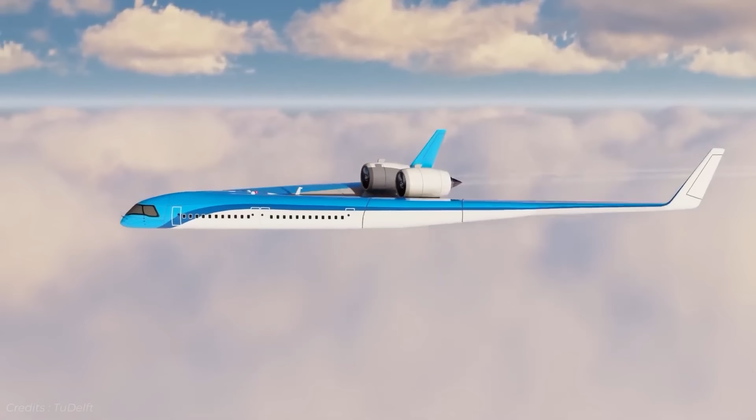The Flying V is a futuristic plane that a lot of you guys found interesting, to say the least. In the first video I made, people went all out in the comment section asking all valid questions like how are airports going to handle this and how is passenger comfort going to play out?

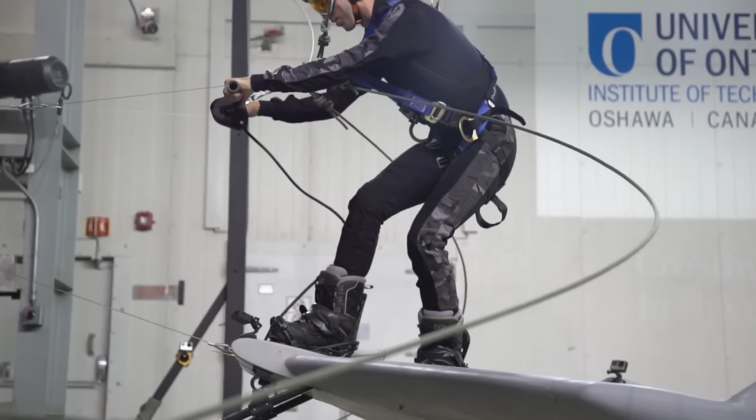But the most critical question asked was, if this design is so revolutionary, why hasn't it taken over the skies yet? What are engineers discovering in wind tunnels that's making even the most optimistic aerospace experts pause? And who is the other player lurking around the corner?

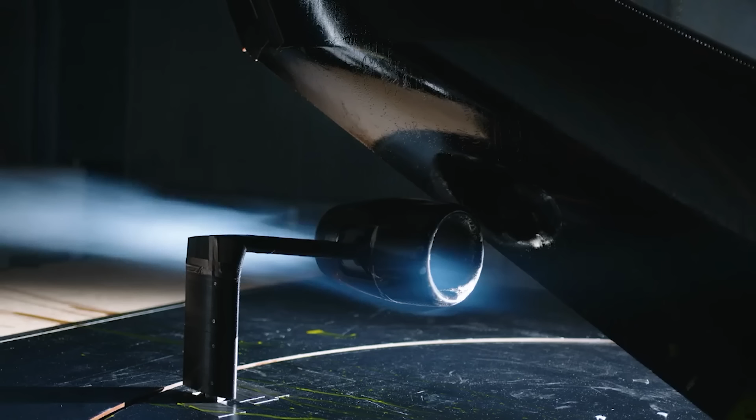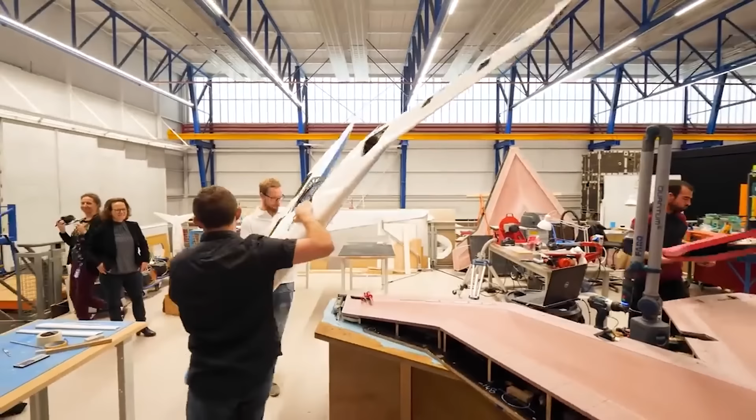Today we're diving once more deep into the Flying V, but this time more into the transition from computer screens to actual flight testing. And we take a closer look at another company working on the same kind of type and how they might be winning the race. You have to keep watching if you want to know all about the recent developments as of the beginning of 2026.

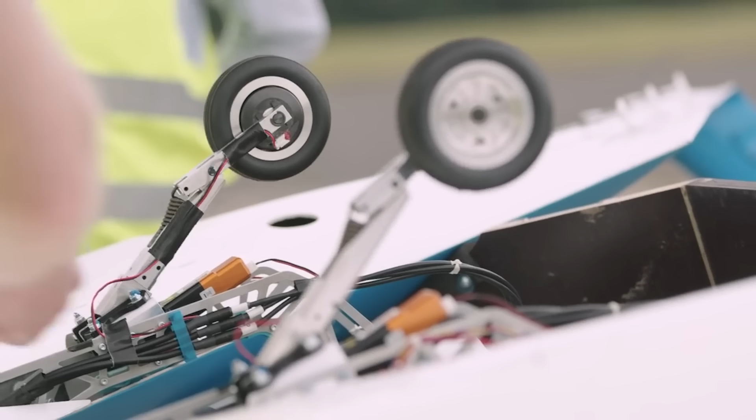What if the revolutionary aircraft that promised to transform aviation is now racing against an American rival with billions in funding and military contracts? A few years ago, the Flying V from the Netherlands went viral, promising 20% fuel savings and a radically different flying experience. But as we enter 2026, the landscape has completely changed.

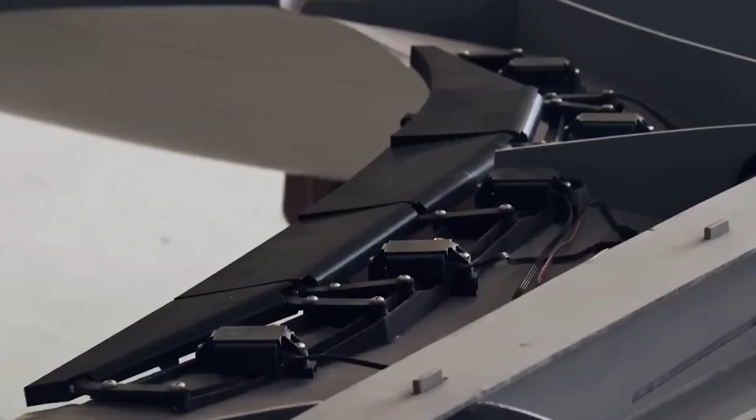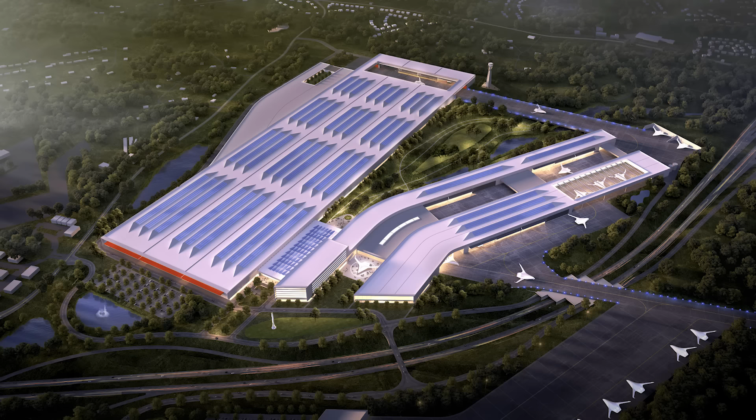JetZero, a California startup, just secured over $1 billion in commitments and is building a $4.7 billion manufacturing facility in North Carolina. Their full-scale demonstrator is scheduled to fly in 2027, with United Airlines already ordering up to 200 aircraft.

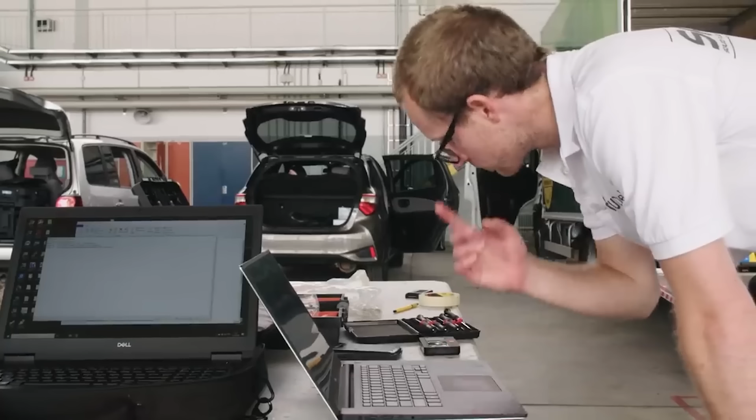Meanwhile, the Flying V team at TU Delft continues their methodical research approach. So here's the real question. Is Europe's careful academic research about to lose to America's aggressive commercialization?

The Flying V began as a master's thesis project by Justus Benad during his internship at Airbus in Hamburg. Since then, TU Delft has partnered with KLM Royal Dutch Airlines and Airbus to develop this radical V-shaped aircraft where the passenger cabin, cargo hold, and fuel tanks are all integrated into the wing structure.

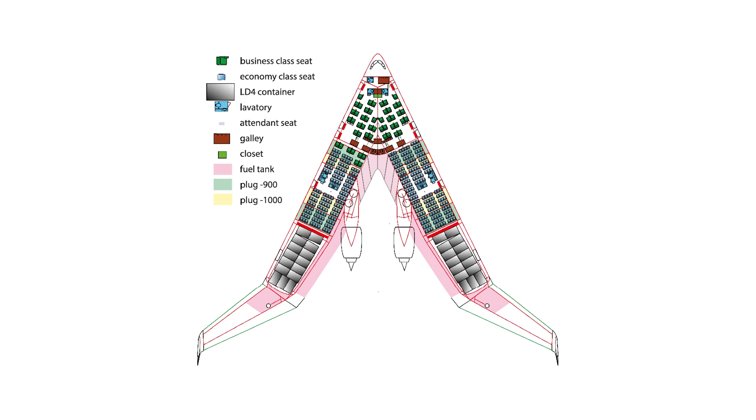The design promises 20% better fuel efficiency compared to an Airbus A350 due to reduced drag and weight. The aircraft would have the same wingspan as an A350, allowing it to use existing airport infrastructure while carrying 314 passengers in standard configuration.

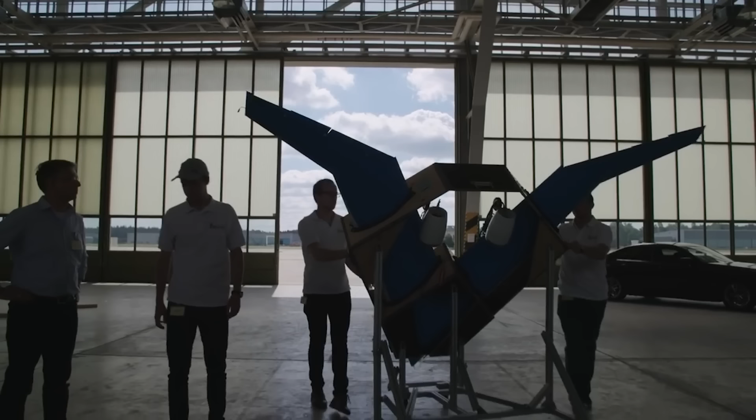In September 2020, the team achieved their first major milestone, flying a scale model at a German airbase. The 22.5 kilogram, 3 meter wide model successfully demonstrated that the radical aerodynamics could work in practice. Chief engineer Malcolm Brown, controlling the plane remotely via laptop, described the emotional moment after 2 years of intensive development.

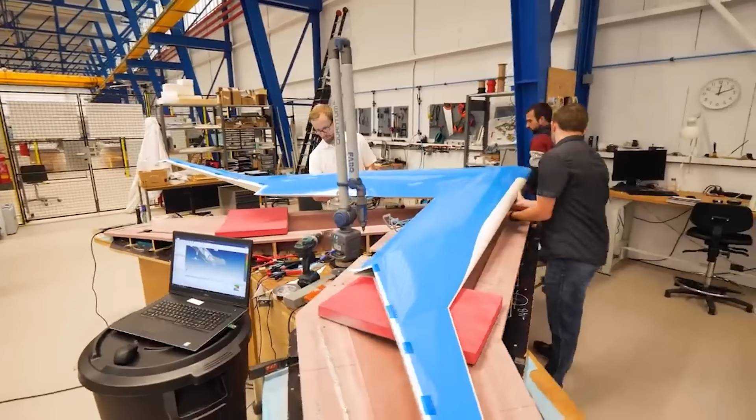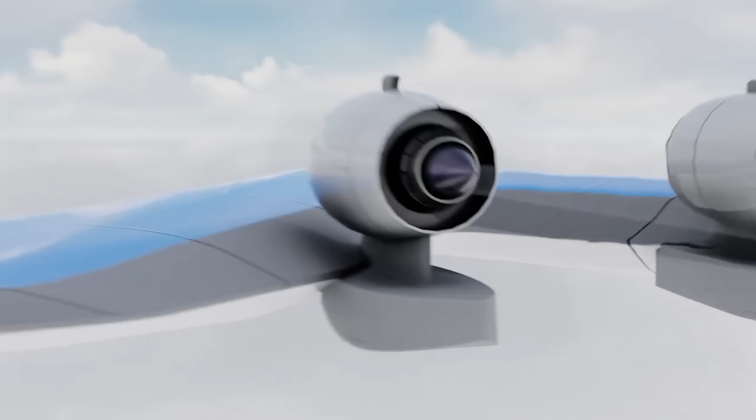However, the flight data revealed a significant challenge that still hasn't been fully solved, the Dutch roll problem. In conventional aircraft, the vertical tail fin acts like a weather vane, providing directional stability. The Flying V has no traditional tail, relying instead on winglets and sophisticated computer control systems.

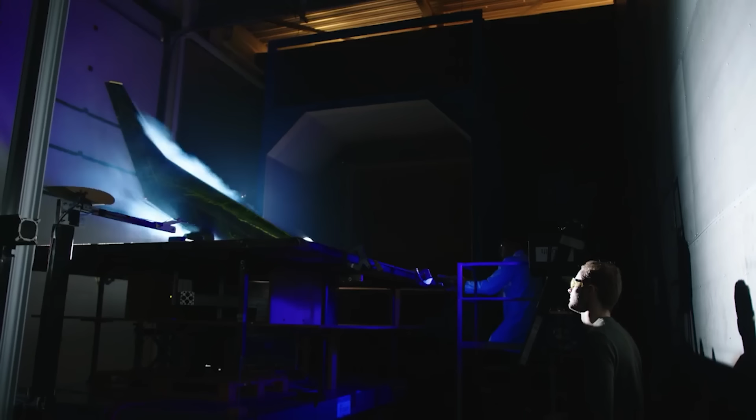During testing, the model exhibited a troublesome yawing and rolling motion that would feel like being on a boat in rough seas to passengers. This isn't just uncomfortable, it's a potential certification showstopper. The team has been working on active flight control systems similar to those used in the B-2 stealth bomber, where computers make hundreds of tiny adjustments per second to maintain stable flight.

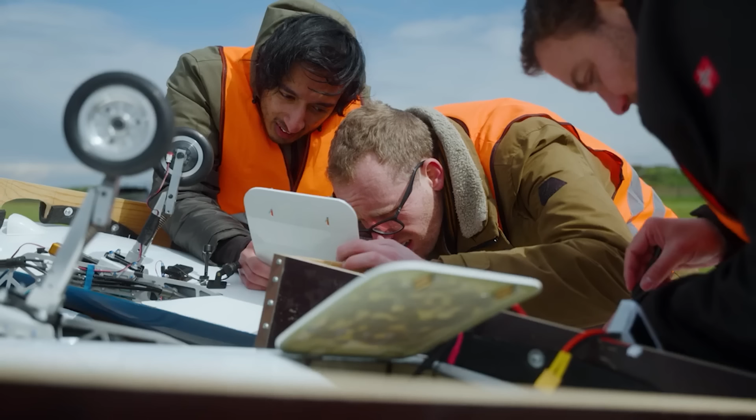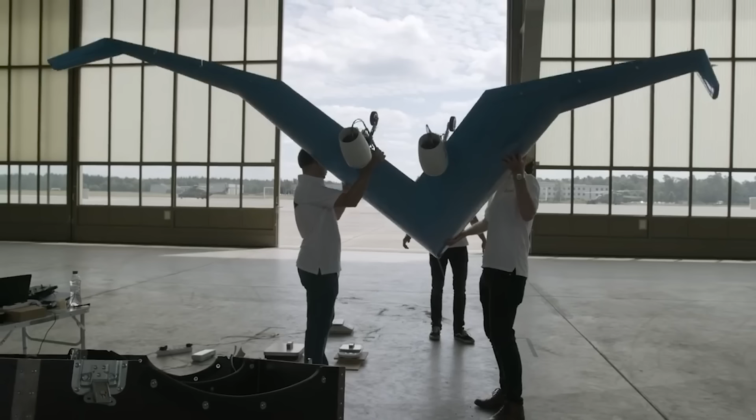As of 2026, TU Delft continues researching multiple aspects of the Flying V. Dr. Roelof Vos, the project leader and associate professor at the Faculty of Aerospace Engineering, has teams working on aerodynamics, structural engineering, noise characteristics, and flight behavior.

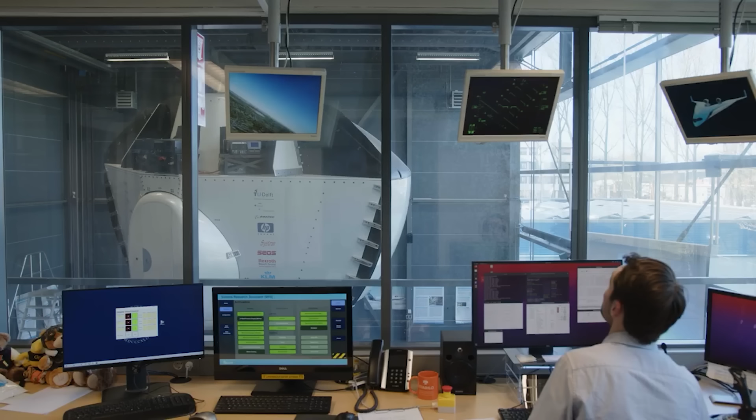The university has conducted at least 8 test flights of the scale model, with data feeding simulators where KLM pilots are now flying the unusual aircraft virtually. According to reports from 2023, pilots describe it as flying like a normal jet once the control systems are properly tuned.

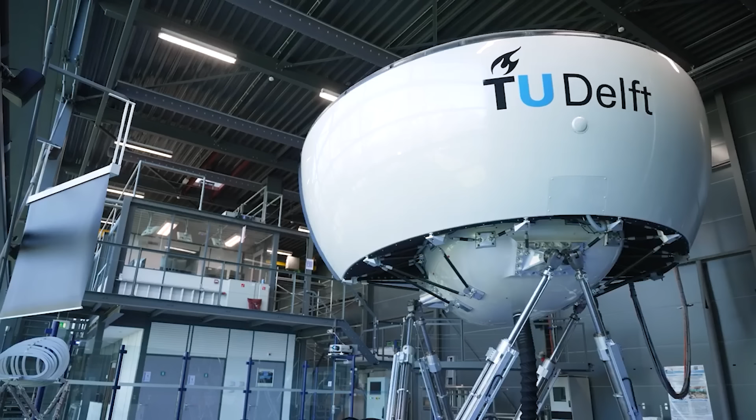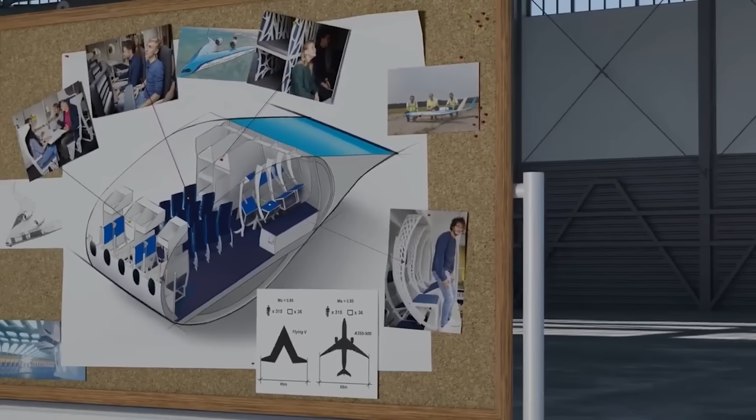The long-term development plan includes several phases: continued simulator work, wind tunnel testing to validate efficiency claims, building a full-scale cabin mock-up for passenger experience research, and eventually constructing a mid-scale demonstrator large enough for a human pilot. The interior mock-up has been particularly interesting, featuring innovative seating arrangements that take advantage of the V-shape's unique geometry.

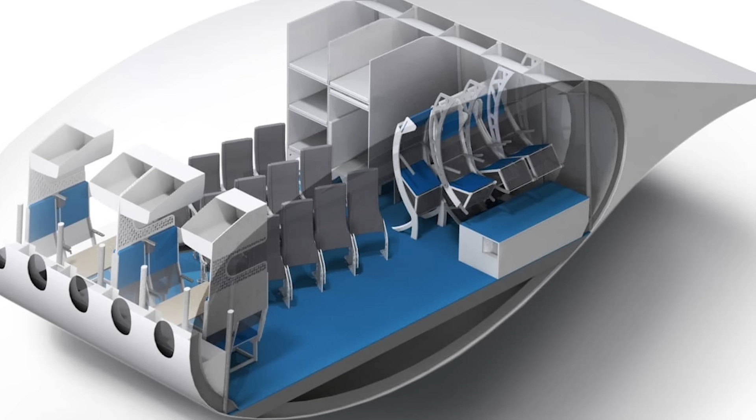Because the wing is so thick, designers can stack seats in staggered, three-dimensional patterns rather than traditional flat rows. They've also created social zones in the corner areas where passengers can sit across from each other at tables, completely reimagining the flying experience. But there is a significant psychological challenge.

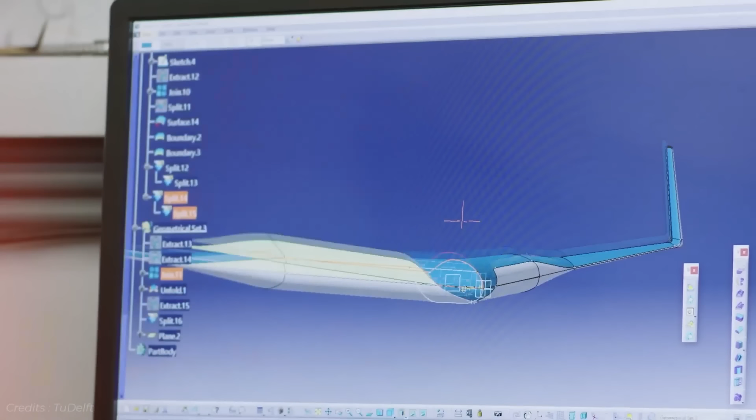Passengers sitting in the center of the wide cabin would have no windows. Researchers are testing virtual window technology using high-definition OLED screens, displaying real-time exterior camera feeds. But early surveys show mixed reactions. Some find it innovative, others deeply uncomfortable.

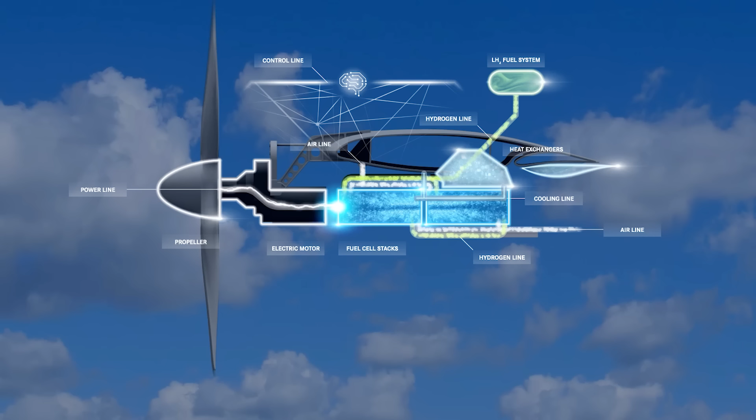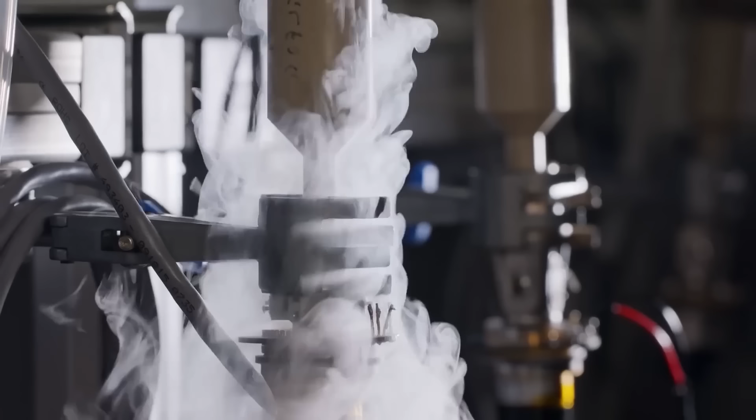Hydrogen propulsion has become central to the Flying V's value proposition. The thick wing structure provides ideal space for the large cylindrical tanks needed to store liquid hydrogen at -253 degrees Celsius. While hydrogen would reduce the aircraft's range by about 35% and consume roughly 70% of cargo volume, Dr. Vos has stated this is the necessary compromise for carbon-neutral aviation.

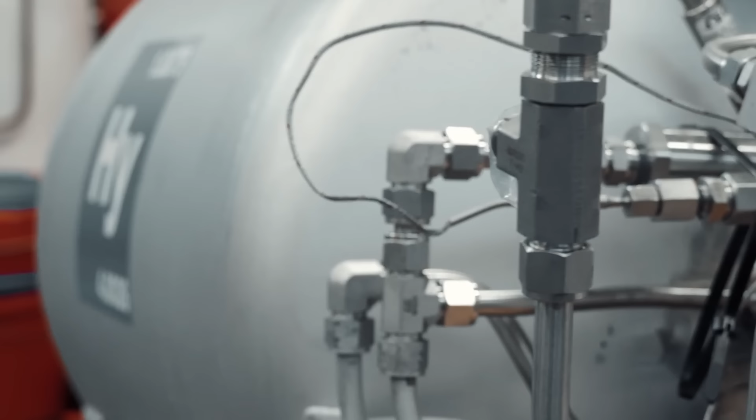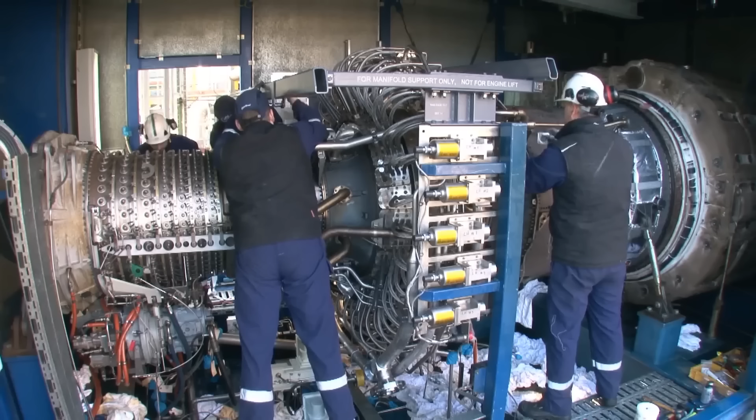TU Delft is actively involved in the EU-funded GOLIAT project, which is developing liquid hydrogen handling and refueling infrastructure at European airports, including Rotterdam The Hague Airport. The university's research covers everything from hydrogen combustion in jet engines to airport ground operations for hydrogen aircraft.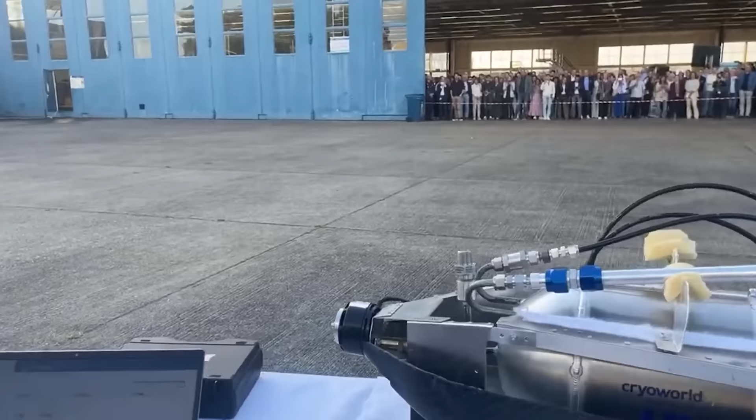Separately, the Aero Delft student team at TU Delft made headlines in 2025 by becoming the first student team worldwide to successfully test a liquid hydrogen-powered aircraft propulsion system. Their full-scale Phoenix aircraft, built on a Sling 4 airframe, aims to fly on gaseous hydrogen in 2025 and liquid hydrogen in 2026. This pioneering work demonstrates that hydrogen aviation isn't just theoretical anymore.

Now, let's talk about the elephant in the hangar, JetZero. This California startup founded in 2021 is pursuing a blended wing body design, which is similar in concept to the Flying V, but with a smoother manta ray shape rather than a sharp V. The critical difference isn't just the shape, it's the approach and resources.

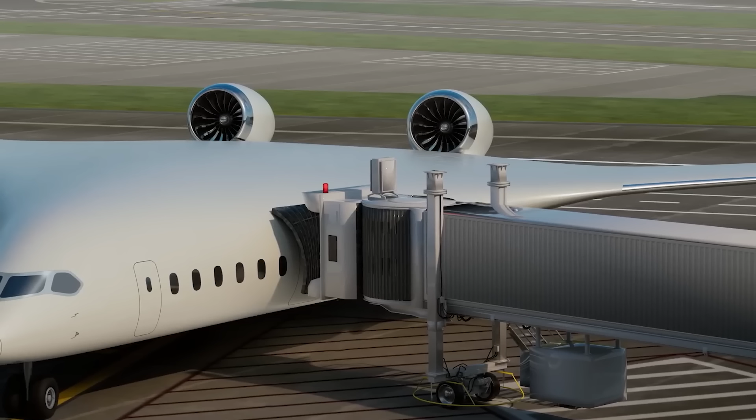In August 2023, the US Air Force awarded JetZero a $235 million contract to build a full-scale demonstrator called the Z4. In January 2024, JetZero announced they've secured over $1 billion in total commitments, including commercial agreements, government grants, and private investment.

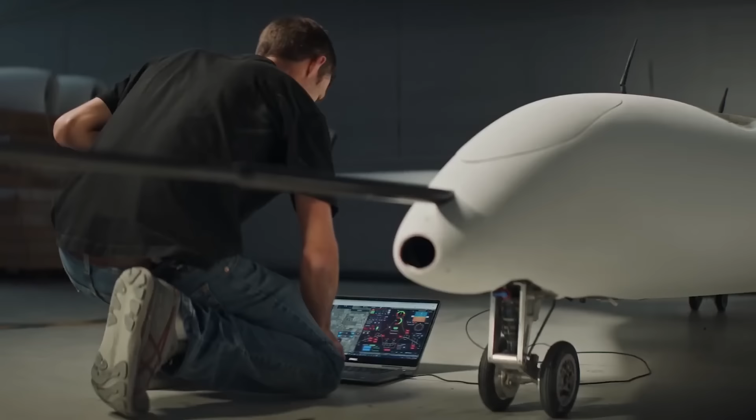The company is investing $4.7 billion to build what they're calling the Factory of the Future near Piedmont Triad International Airport in North Carolina, creating an estimated 14,500 jobs. This represents possibly the largest job announcement in North Carolina history.

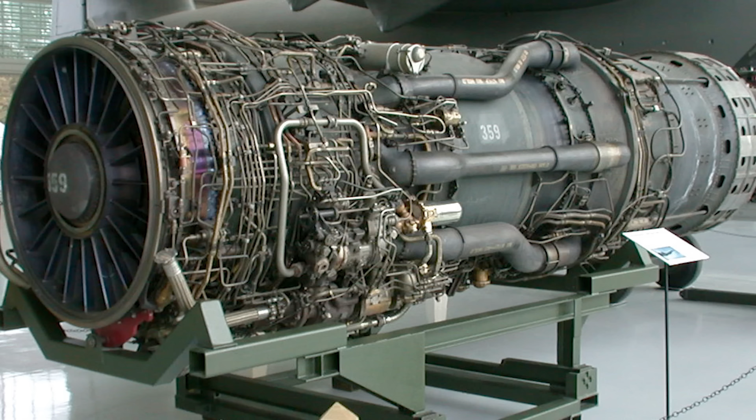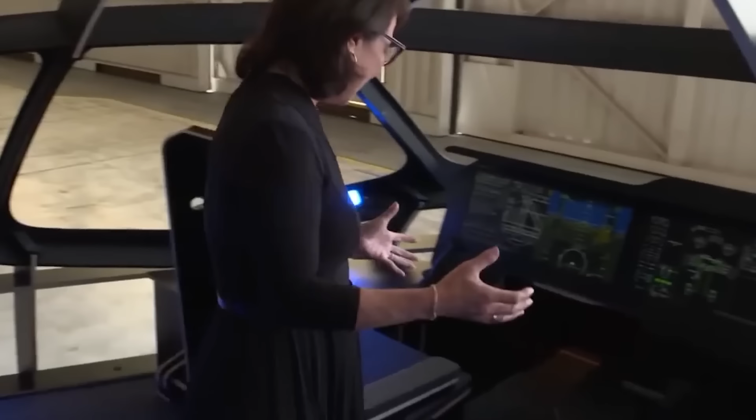The Z4 is designed to carry 250 passengers using existing Pratt & Whitney engines, targeting what's called the middle of the market category, between narrow-body and wide-body aircraft. JetZero claims their design will achieve 50% better fuel efficiency compared to current aircraft, significantly more ambitious than the Flying V's 20% target. The full-scale demonstrator is being built by Scaled Composites, with fabrication taking place throughout 2026, ground testing starting in April 2027, and first flight scheduled for September 2027.

The commercial interest in JetZero is remarkable. United Airlines signed a conditional purchase agreement for up to 200 Z4 aircraft, with the order dependent on hitting development milestones, including that crucial 2027 first flight. Alaska Airlines provided funding in an earlier investment round. Delta Airlines is providing expertise on cabin layout and passenger experience, with their representatives enthusiastically describing the potential for revolutionary customer service in the uniquely shaped cabin.

In July 2025, at the American Institute of Aeronautics and Astronautics Aviation Forum in Las Vegas, JetZero and its airline partners showcased their vision for the passenger experience. The triangular cabin layout allows for a central bar or island area, fundamentally reimagining how flight attendants can deliver service. Delta's Director of Sustainable Skies Lab, Sangeeta Sharma, told attendees that their flight attendants are genuinely excited about delivering a next-level customer experience in this aircraft.

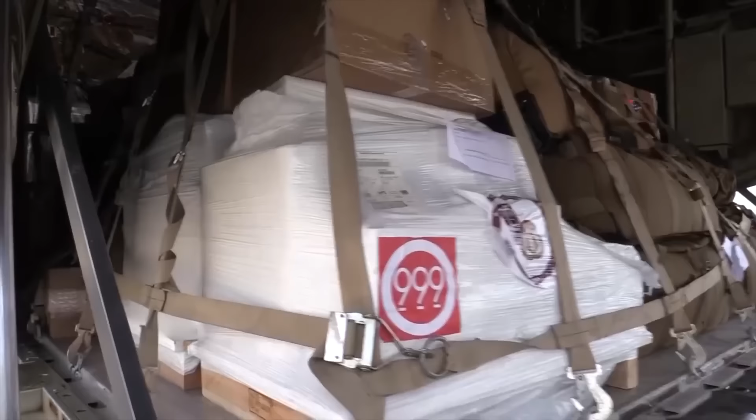The Air Force's interest goes beyond just fuel efficiency. Military logistics depend heavily on fuel supply chains, and a 50% reduction in fuel consumption would be strategically significant for military operations. Additionally, the Air Force is exploring the blended wing body design as a potential platform for next-generation aerial refueling and cargo transport, possibly replacing aging C-5, C-17, and C-130 fleets.

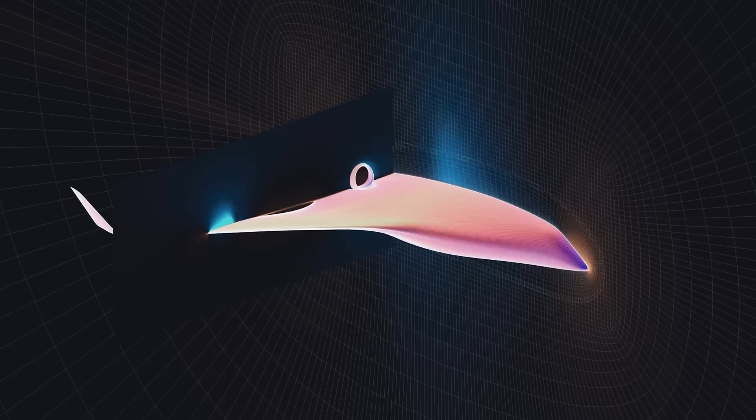As of early 2026, JetZero reports significant progress. They've completed cockpit tooling, are testing full-scale fuel tanks, evaluating wing test articles, and have already conducted flight tests on a subscale model called the Pathfinder, which received FAA airworthiness certification. The company passed its critical design review in mid-2025. All systems are tracking toward that September 2027 first flight target.

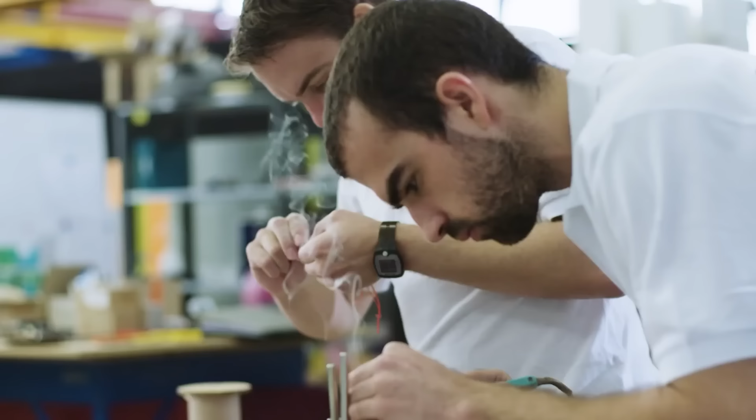So what does this mean for the Flying V? The European project continues its methodical academic approach, publishing research papers and advancing scientific understanding. TU Delft has permanent staff and graduate students working on various aspects, with Airbus maintaining involvement. However, there's no announced timeline for a full-scale demonstrator, no massive manufacturing facility under construction, and no conditional purchase orders from airlines. The contrast is striking.

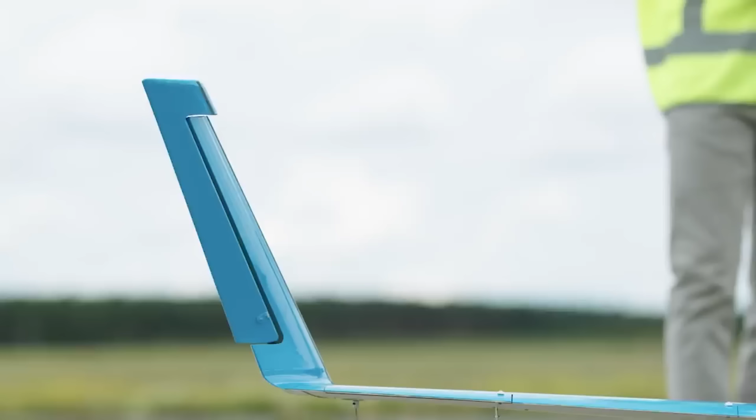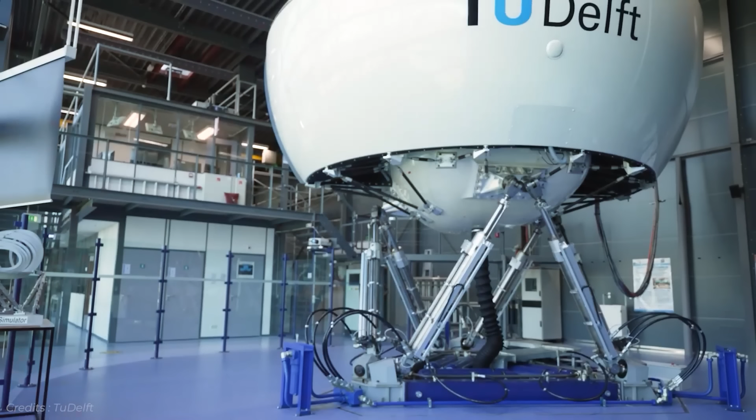JetZero is moving at startup speed with military urgency and massive financial backing. The Flying V is progressing at an academic research pace with university funding and corporate sponsorship. JetZero is building a factory before their demonstrator has even flown. TU Delft is still flying scale models and running simulations.

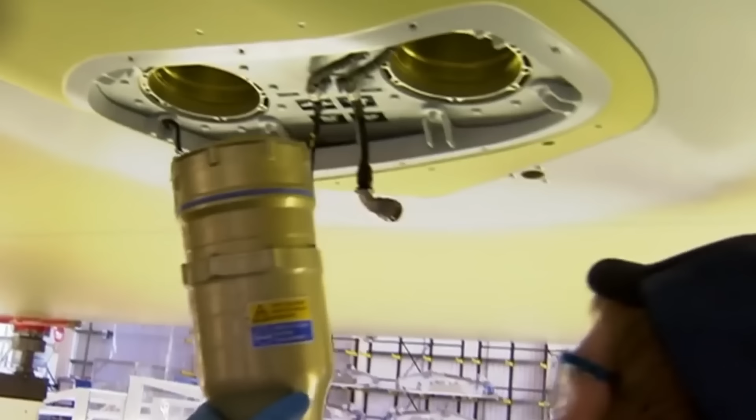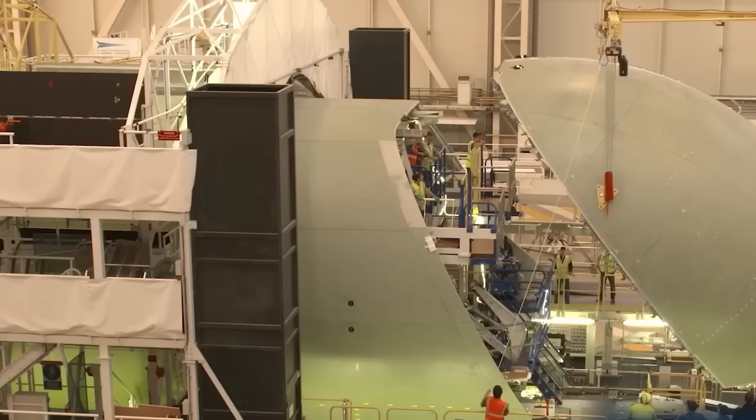Both Boeing and Airbus remain publicly uncommitted to either blended wing concept. These aerospace giants are masters of incrementalism, making conventional tube and wing designs 1% better each year. Pivoting to a completely new aircraft architecture would require rebuilding entire supply chains, retraining thousands of workers, redesigning maintenance procedures, and investing potentially hundreds of billions of dollars. For them, the Flying V and JetZero represent fascinating research, but massive financial risk.

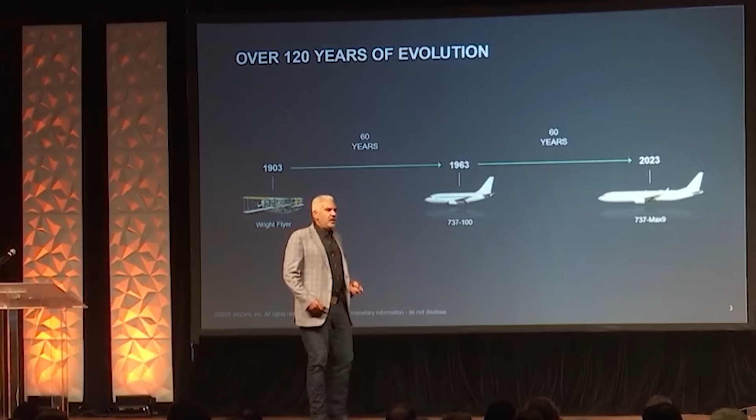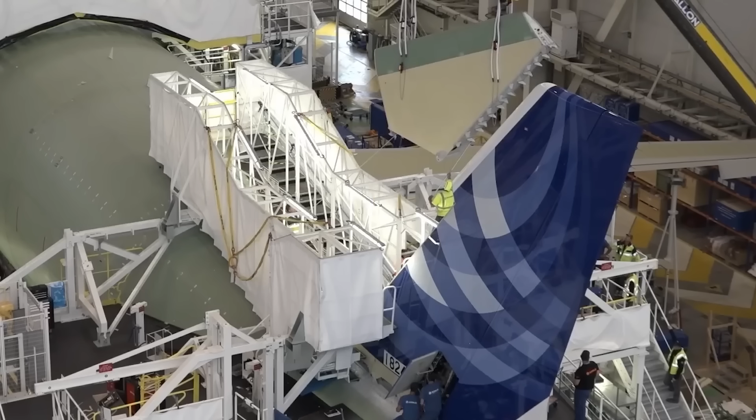However, the pressure is building. If JetZero's 2027 demonstrator flight succeeds and validates their 50% fuel efficiency claims, Airbus and Boeing will face uncomfortable questions from shareholders about why they're not pursuing similar technology. United Airlines' conditional order signals that major carriers are seriously considering these radical designs, not just as interesting concepts, but as potential fleet replacements for the 2030s.

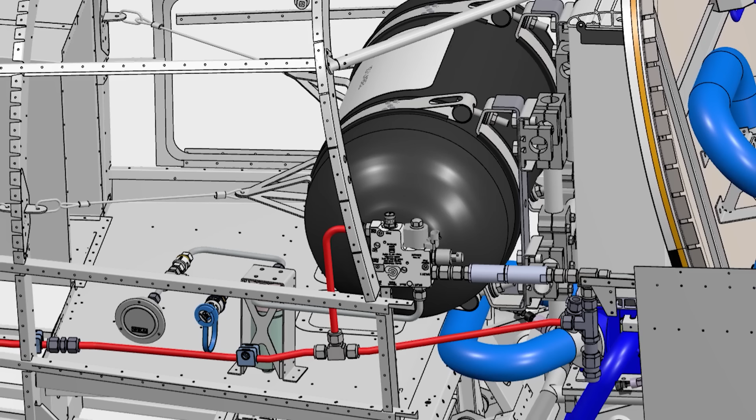The hydrogen angle adds another dimension. Both designs claim superiority for hydrogen storage, but they're solving slightly different problems. The Flying V's extended arms provide long cylindrical volumes, ideal for high-pressure hydrogen tanks. JetZero's smoother blended design might offer better aerodynamics, but potentially less optimal tank geometry.

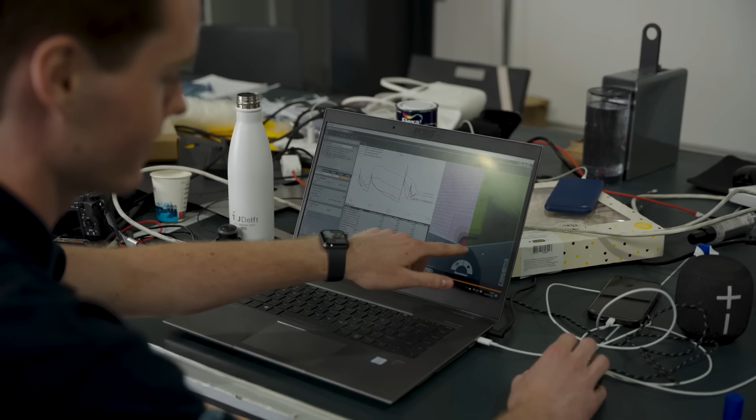As Europe pushes aggressively toward hydrogen aviation infrastructure through projects like Goliath, and as liquid hydrogen propulsion technology matures through efforts like Delft's groundbreaking tests, the aircraft best suited for hydrogen could win, regardless of which is slightly more efficient on conventional fuel. There's also the geopolitical element.

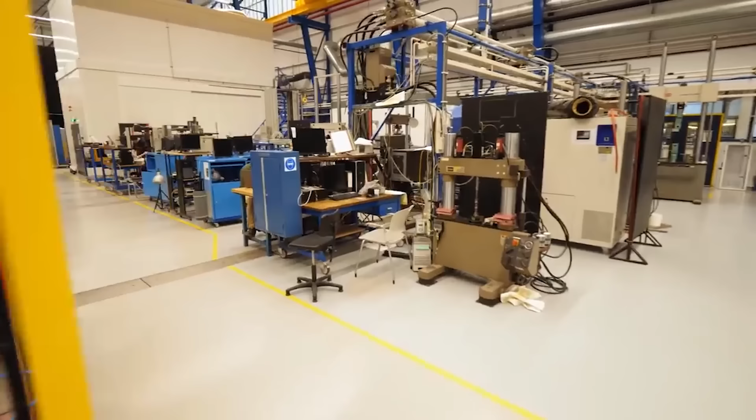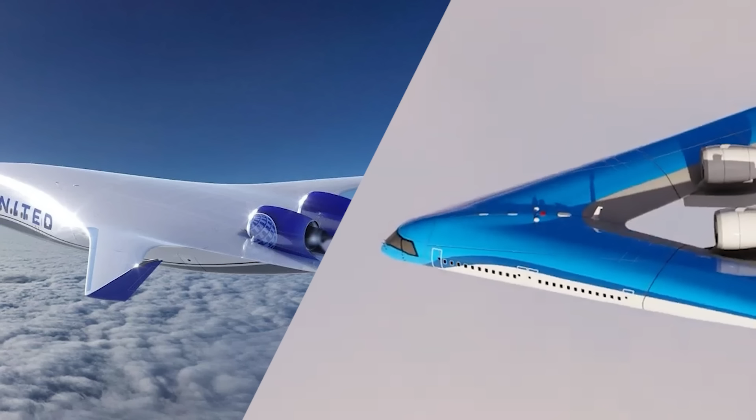JetZero represents American aerospace ambition backed by military funding and aggressive commercialization. The Flying V represents European academic excellence and methodical research. This mirrors broader patterns in aerospace development, where American companies often move faster with greater risk tolerance, while European projects prioritize thoroughness and safety. The regulatory path remains uncertain for both.

Aviation certification authorities have never approved a passenger aircraft without a conventional tail that requires constant computer intervention for basic stability. The FAA and EASA will need to develop entirely new certification frameworks. JetZero's military contract might help establish some precedents, but commercial passenger certification is a different beast entirely.

The passenger acceptance question looms large for both designs. Will travelers trust an aircraft that looks nothing like what they've flown on for their entire lives? Will they accept windowless center seating even with virtual windows? Will they pay premium prices for the novelty? Or will they choose the cheapest ticket regardless of aircraft type? Airlines have learned that passengers generally choose price over experience, which is why economy class keeps getting denser and less comfortable. As we move through 2026, the race is definitely on.

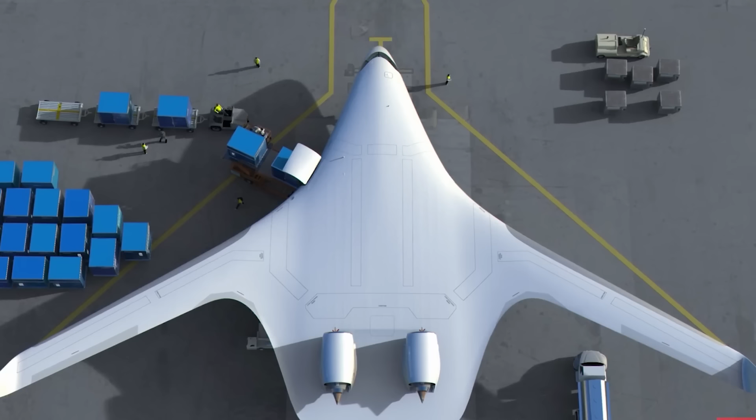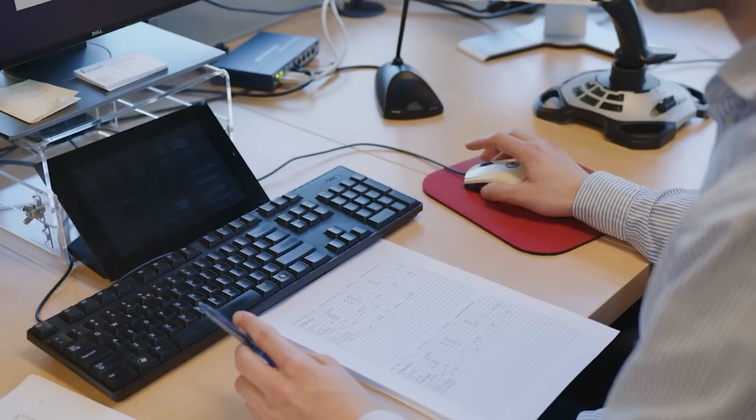JetZero is sprinting toward their 2027 demonstrator flight with massive resources and commercial partnerships. The Flying V continues its careful research progression with no announced demonstrator timeline. The winner might not be determined by which design is technically superior, but by which team can navigate certification, secure airline commitments, and build production capacity first.

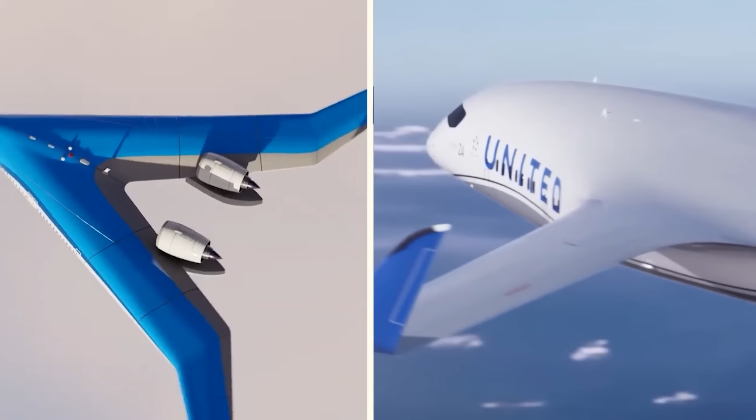The tube and wing design has dominated commercial aviation for over a century, but physics and economics are finally aligning to make radical alternatives viable. The Flying V proved the aerodynamics work. JetZero is proving the commercial model might work. Together, they're forcing the entire aerospace industry to reconsider what a passenger aircraft should look like.

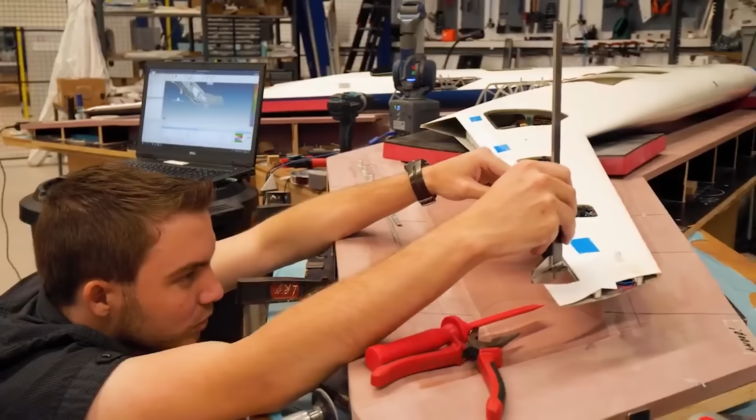One thing is certain. By 2030, we'll know whether blended wing bodies represent aviation's future or just an ambitious footnote. The Flying V and JetZero have moved beyond concepts and CGI renderings. They're flying hardware, building facilities, and attracting serious commercial interest. The revolution might not be televised, but it's definitely being engineered.

What do you think? Would you be willing to fly on an aircraft with no traditional fuselage, potentially sitting in the wing with no window? The answer to that question might determine whether your grandchildren fly in tubes or wings.